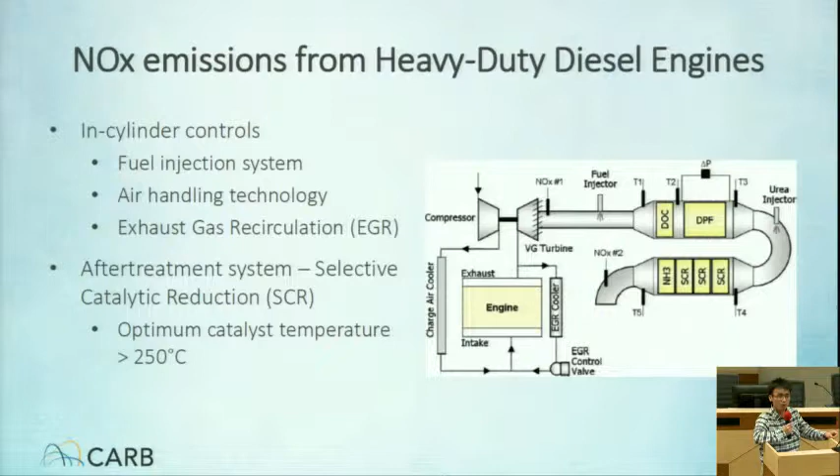The SCR system introduces aqueous urea to the SCR catalyst, which can decompose to form ammonia. This ammonia can react with NOx over the catalyst, forming nitrogen and water. The optimum catalyst temperature should be higher than 250 degrees C.

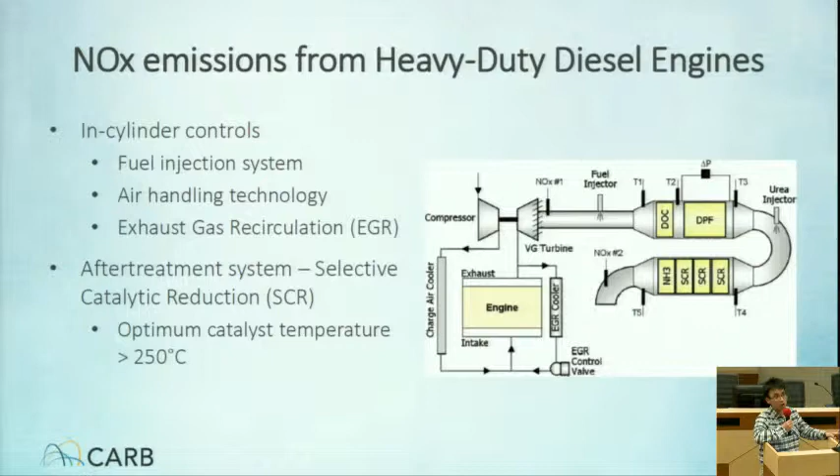Under these conditions, copper zeolite catalyst can reduce more than 90% of the total NOx.

Heavy-duty diesel vehicle certification is a very complicated process. These engines are certified using an engine dynamometer. Engines are tested over the federal test procedure, called FTP, and the supplemental emission test, called SET. NOx emissions should be less than 0.2 grams per brake horsepower hour, or the applicable family emission limit, FEL. Engine dyno testing uses laboratory-grade instruments, so it has very high accuracy and precision.

For the vehicles, there is an in-use compliance requirement. Engine-certified vehicles should meet the Not-To-Exceed, NTE, standard in real-world driving. Emissions are measured using portable emission measurement systems. These systems are less accurate compared to lab equipment.

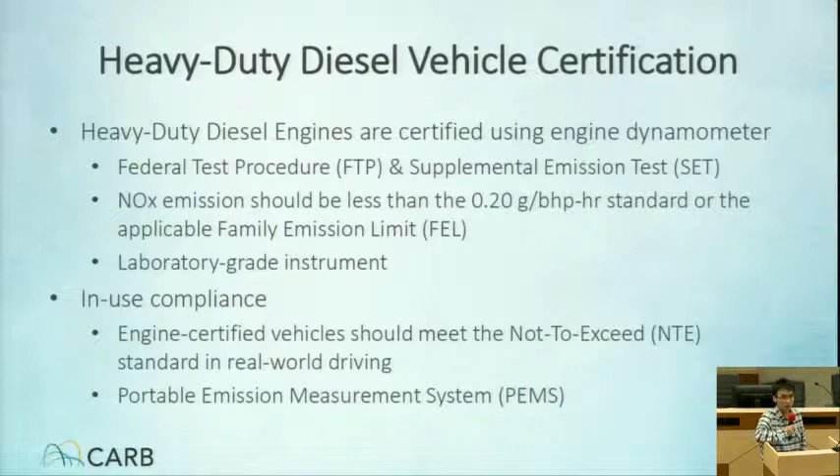However, real-world observations show that in-use NOx emissions can be much higher than expected. On the right side is a paper just accepted from our group, which showed that in-use NOx emissions can be much higher compared to the 0.2 grams per brake horsepower hour standard in many real-world applications.

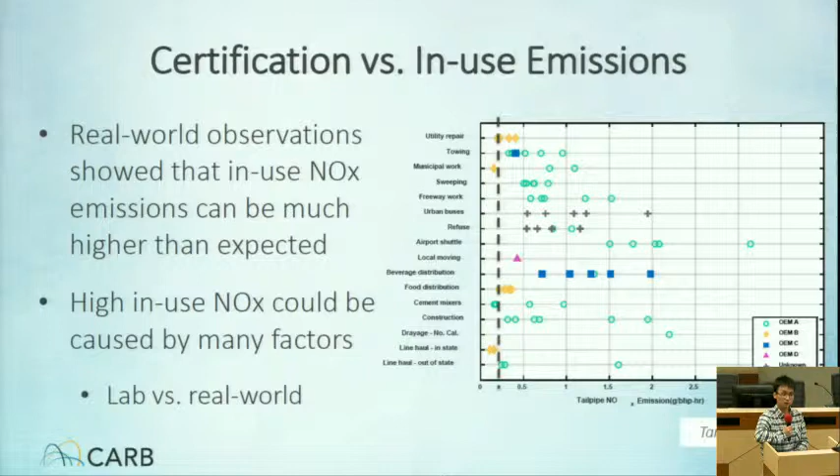High in-use NOx emissions could be caused by many factors, for example, the difference between lab conditions and real-world driving conditions, and differences in load factors. All those could contribute to the difference, but we want to understand the exact cause of these differences in this project.

As I mentioned earlier, heavy-duty vehicles have to meet the in-use compliance standard, the NTE standard. NTE requirements were developed back in early 2000, designed to help ensure heavy-duty diesel engines' in-use emissions are properly controlled. However, it's not a sufficient measure to control in-use emissions because it excluded a lot of operations.

For example, low-load operations are excluded by NTE, and when the exhaust temperature is colder than 250 degrees C, those operations are also excluded. So the NTE requirements only control a very limited area of engine operation, and we want to evaluate through this project how effective the current NTE standard is, and figure out if there are other alternative metrics.

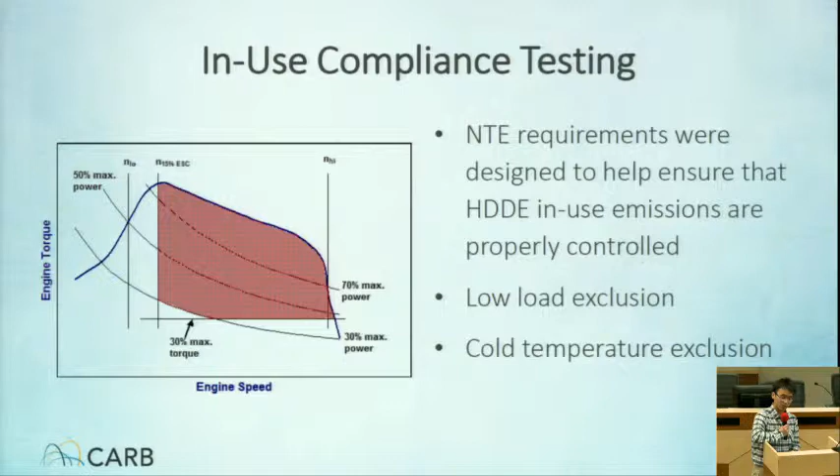So the objective of this project is to measure and understand the differences between NOx emissions on certification and in-use conditions for the same engine. We want to evaluate current and proposed in-use compliance procedures.

In this study, CE-CERT tested 2 heavy-duty diesel engines from 2 different OEMs. Both engines were certified to the 0.2 grams per brake horsepower hour NOx standard. They tested these engines on chassis dyno, engine dyno, and on-road, and they have some very interesting findings from this project.

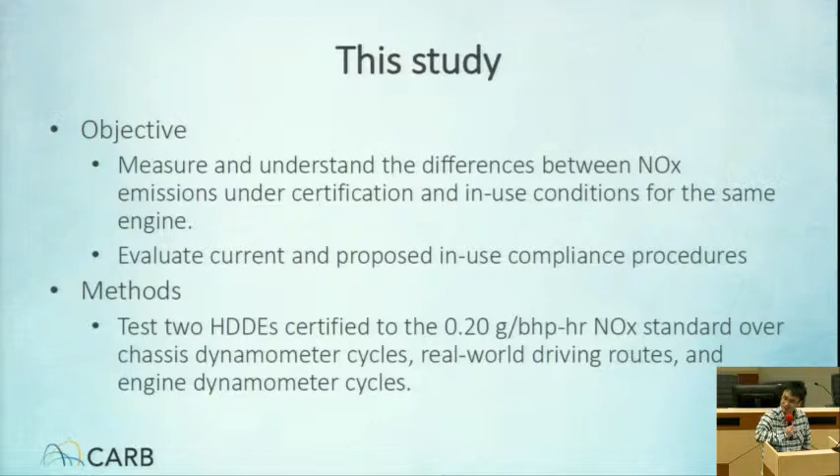So Tom, I will give this to you now, it's your turn, and you can talk about your findings.

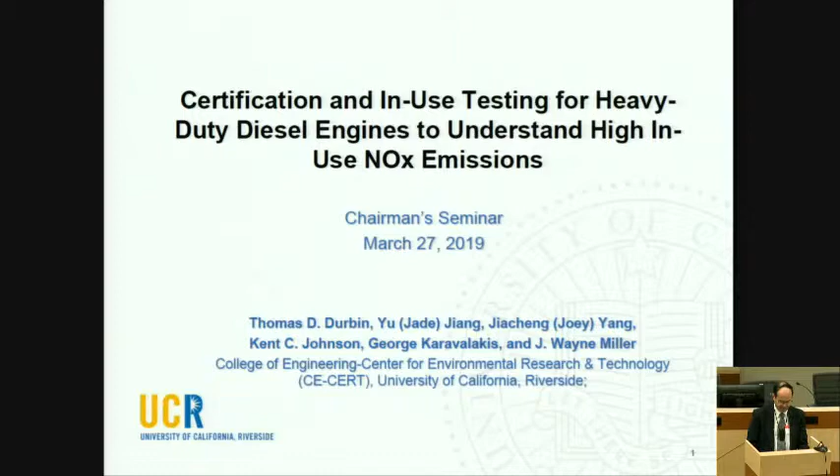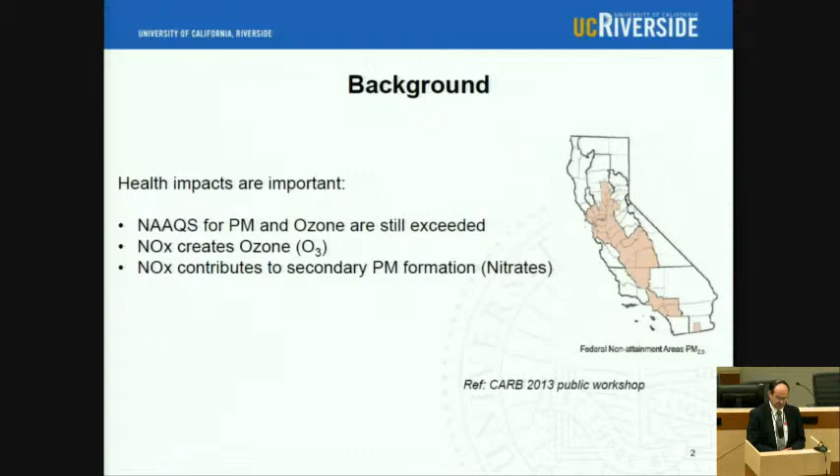Yi gave a good background there. I want to give just a little bit of a different background, starting out broadly, is that looking at health effects being very important and driving what's going on here. And if you look at the national air quality standards, you can see that there's a lot of non-attainment areas, both for PM and for ozone. NOx in particular contributes a lot to ozone, as well as the contribution to secondary PM formation in urban areas.

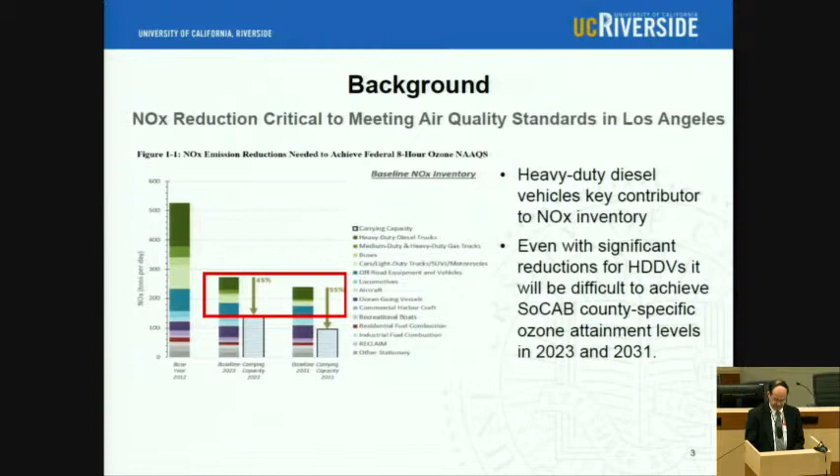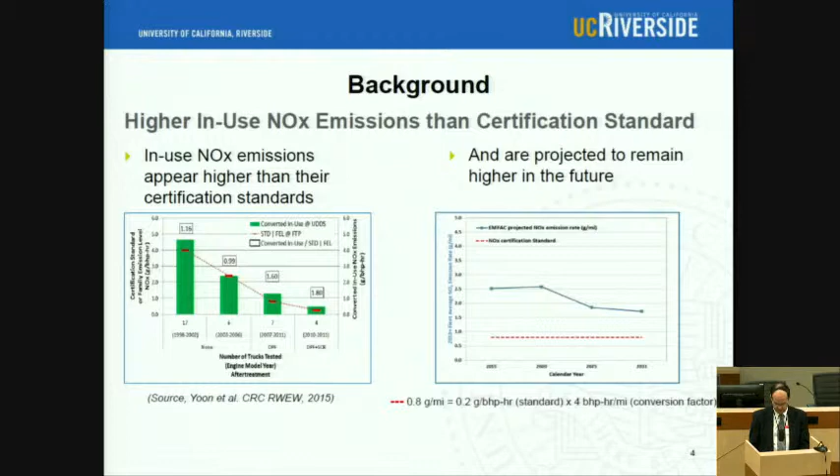On the right-hand side is simply looking into the future, and we look at the EMFAC projections of what the gram per mile emission rates are in blue, compared to the red dashed line, which is where one might expect if all operation was at that 0.2 level. You can see that there's likely to continue to be a disparity between the in-use and what one might hope for based on the certification.

So this particular study, the idea here is that heavy-duty diesel engines are designed and certified to meet emission standards on an engine dynamometer test stand before the engine gets inserted into the vehicle. So really we're trying to better understand that transition between the engine dynamometer testing and conditions to the in-use conditions on the same engine.

So basically we took two heavy-duty vehicles and we looked at emissions under varying conditions, including in-use conditions, chassis dynamometer conditions, and engine dynamometer testing conditions. The two vehicles were both 2013 to 14 vehicles that had engines certified to the 0.2 gram NOx standard.

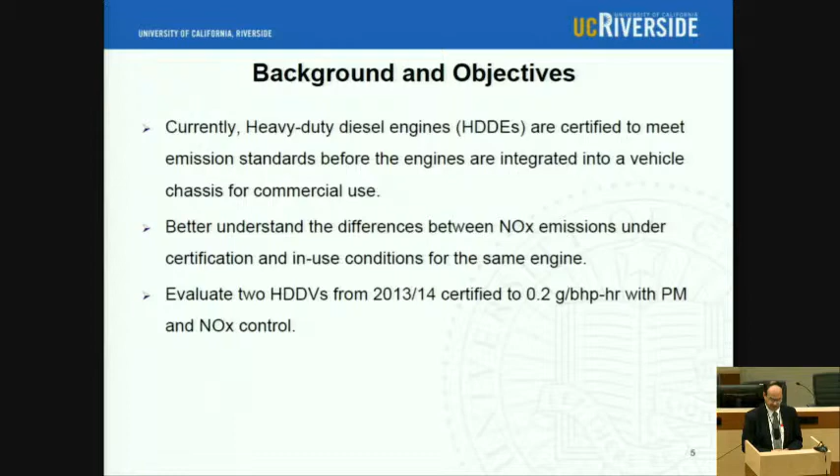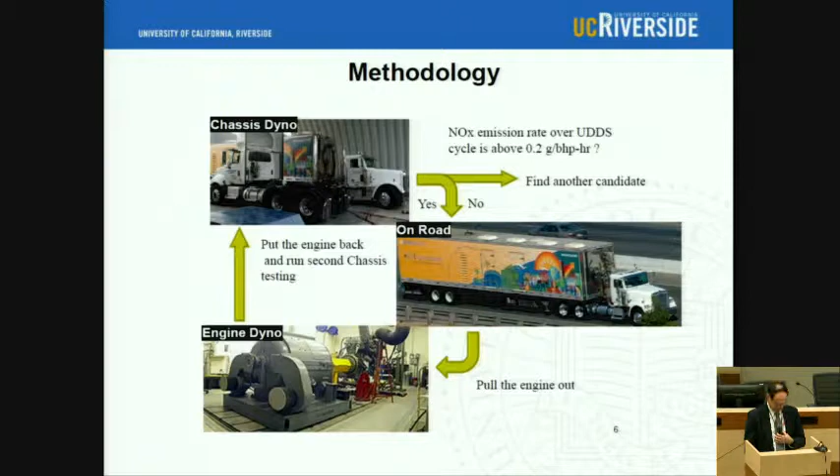The procedure for both vehicles was the same. We start off with the engine in the vehicle and on the chassis dynamometer, and we run it over a series of cycles, and we look to see if the UDDS emissions are higher than 0.2 gram per brake horsepower hour. Once we've confirmed that, we do some additional on-road testing with our mobile trailer, and actually a lot of that testing was done simply with PEMS that were mounted inside of the trailer. Then the engine was pulled out and put on our engine dynamometer test stand and run through a series of tests. And then finally, the engine was put back into the vehicle to see that we were roughly able to recreate the same conditions that the vehicle was seeing once it came into the test facility.

So this is a test matrix that breaks down the different types of testing that we did. This runs somewhat chronological, at least in terms of the main methodologies here. We basically did a chassis dynamometer test, and in doing that, we did tests representative of urban driving, including the UDDS test cycle, the CARB transient cycle, as well as freeway types of cycles that included cruise cycles at 55 and 65 miles per hour.

So once that was completed, we took the vehicle on road, and here we had three on-road cycles that were predominantly highway cycles. I'll provide more information on that later in the presentation. And then we replicated the UDDS on road, and I'll be talking about that later as well.

So for engine dynamometer testing, again, we did a series of tests. Some of them were FTP, UDDS type of tests that were more consistent with urban conditions. And then we did the ramp modal cycle and different cruise cycles that were basically adapted from chassis dynamometer data. And then finally, we returned the engine to the vehicle, and we ran a follow-up chassis dynamometer testing.

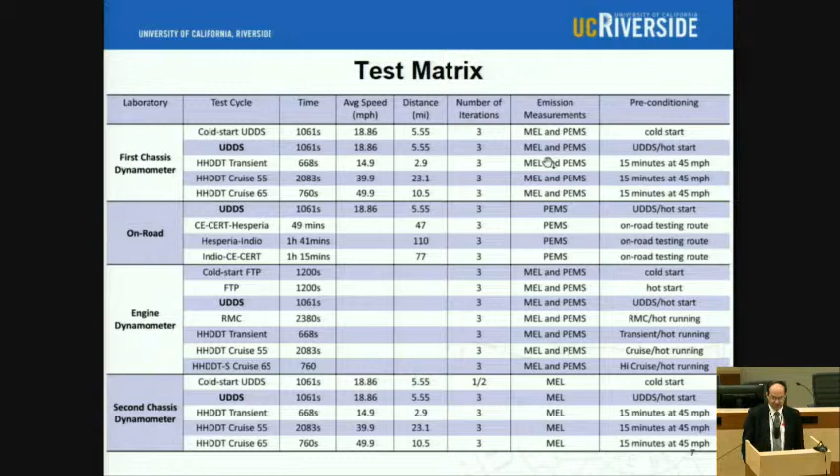So just going over the emissions measurements, we tried to look at the emissions with both our emissions trailer, which is 1065 compliant, as well as PEMS. So two different methods, except for the on-road, where we only used the PEMS, and the second chassis dynamometer, where we only used the emissions trailer.

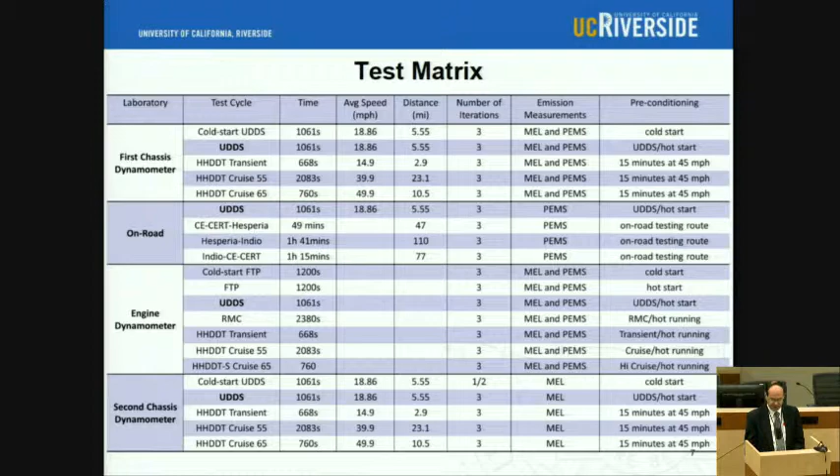And then we also have different preconditioning. Most of these were run as hot running cycles, where we warmed up the vehicle immediately before doing the cycle, with the exception of the UDDS cycles and the FTP cycles. Those were all run as hot start cycles with 20-minute soak periods in between tests.

is first, if you look at kind of metrics for comparison, obviously the certification standard at 0.2 might be one metric that you are looking to compare against. Again, we're not necessarily looking for this to be a certification substitute in any way, it is a research program.

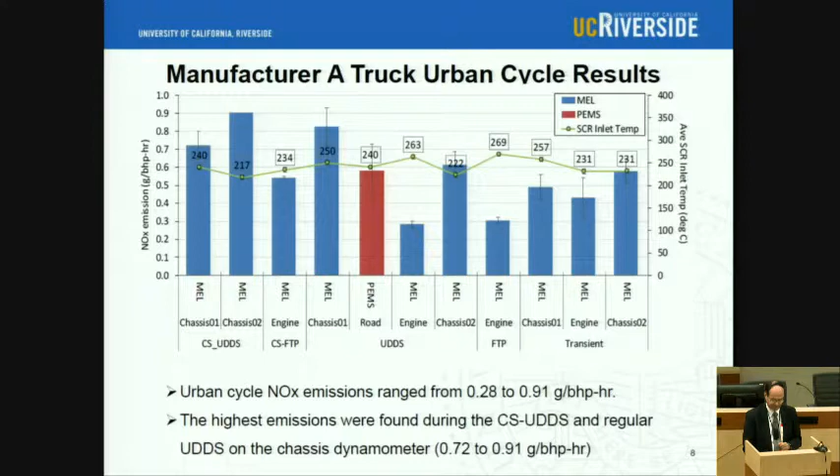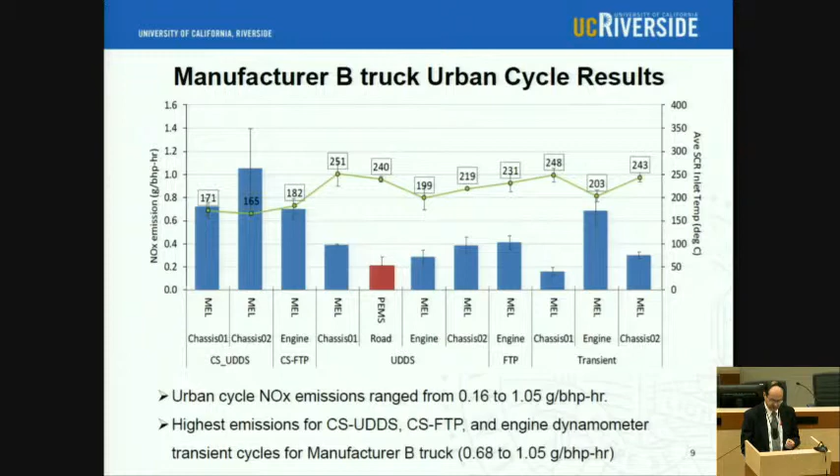what one might expect. And I will note that the engines had, I think one engine had slightly over 100,000 miles on it. The second engine had about 220 or 230,000 miles on it. So they're not brand new vehicles or brand new engines here that we're looking at.

Okay, so now let's move from the urban cycles to the cycles that are either freeway cruising cycles and or steady state, like the ramp modal cycle on the far right side here.

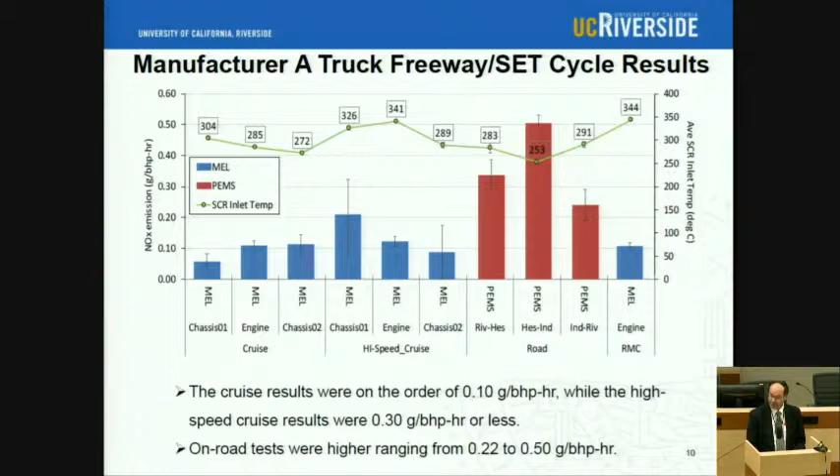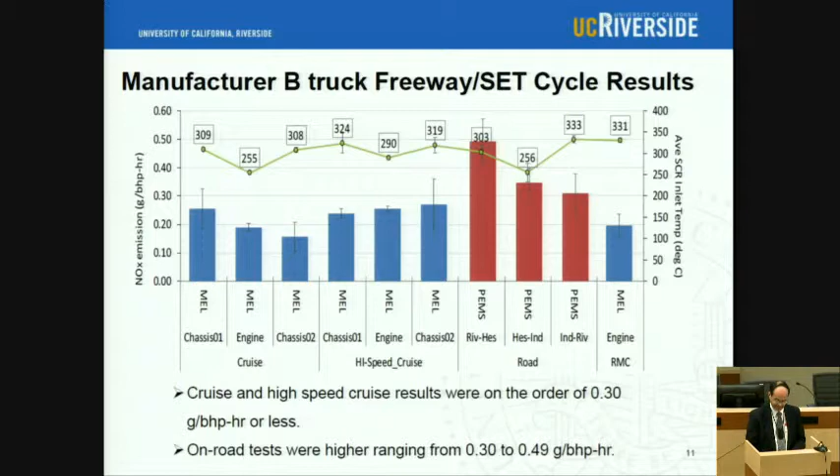Okay, so now we're going to look at some of the different test sequences in a little bit more detail to try to understand what is going on in terms of this comparison between the engine and the chassis dynamometer and on-road testing. So we're going to start off just with the base FTP tests.

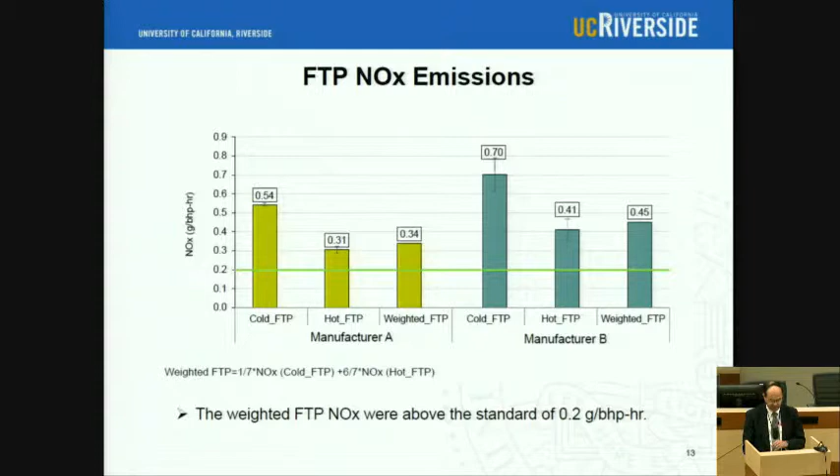So again here, the green line does show the certification. So at least for the engines we had in the laboratory, we were slightly above the certification standards for both engines. Again, that's not necessarily any indication of compliance. It's just kind of a baseline for where the engines were performing as they came out of the trucks at the mileages that we pulled them out. There's some additional details related to manufacturer A and the engine testing that I'm going to get to in a few minutes as well.

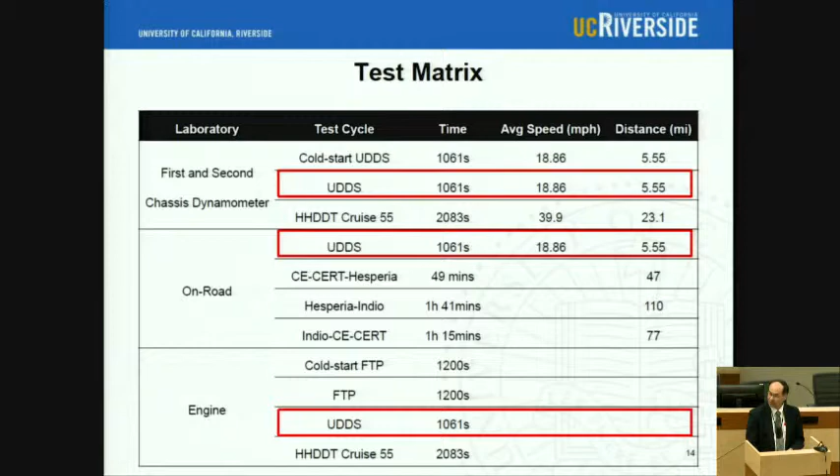So secondly, we want to look at some of the comparisons between the UDDS cycle, and the interesting part there is that this particular cycle was done in all of the different phases. So we did a UDDS for the chassis dynamometer. We replicated that UDDS for the in-use testing, or on-road testing, and then also for the engine dynamometer testing.

So I want to get into sort of how that was done. The starting point for all of the UDDS testing was the chassis dynamometer test. We ran the chassis dynamometer test on our chassis dynamometer as the first test that we did. So to translate that into the engine dynamometer test, we basically took the RPM and the torque values and directly translated them so that when we ran the engine dynamometer test, we basically mimicked the torque and RPM that was seen when we were doing the chassis dynamometer test.

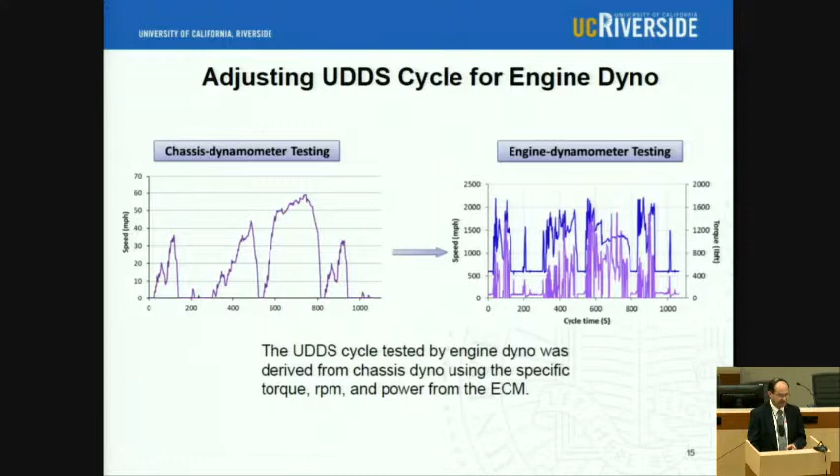Just as a frame of reference, some of the other engine dynamometer cycles were not directly pulled from this particular engine. They were basically pulled from the ACES program, where there was a lot of studies done in terms of converting chassis dynamometer to engine dynamometer test parameters. So for most of them, we pulled and utilized those cycles, but for the UDDS, we specifically looked at the engine that we were testing for this program to try to make it as close a comparison as we could.

Okay, so for the on-road UDDS, we had to use a little bit different strategy. Again, you're looking for a place that you want to have a relatively flat road. You want to have a road where you can drive relatively decent speeds for periods of time that are several miles, and you want to not be in a condition where you've got a lot of traffic that's going to interfere with that driving. And you live in Southern California, so it limits your options somewhat in what you can do. I mean, you can't do a UDDS on the freeway. You can't do it in the middle of the urban environment because you're going to be right in the middle of traffic.

So to do this, we basically went to the far eastern edge of the Palm Springs area to a place called Thermal, just east and south of Indio, California, if you're familiar with that. And we basically looked at some of the agriculture roads that are out there. If you look at the left-hand side of the screen, there's 3 different segments to the on-road testing here, denoted M1, M2, and M3. So what you can see here is that we did have to split the road up and run this as individual segments. There simply wasn't a road long enough to do this in one single iteration, where you wouldn't run into traffic lights or any kind of traffic conditions.

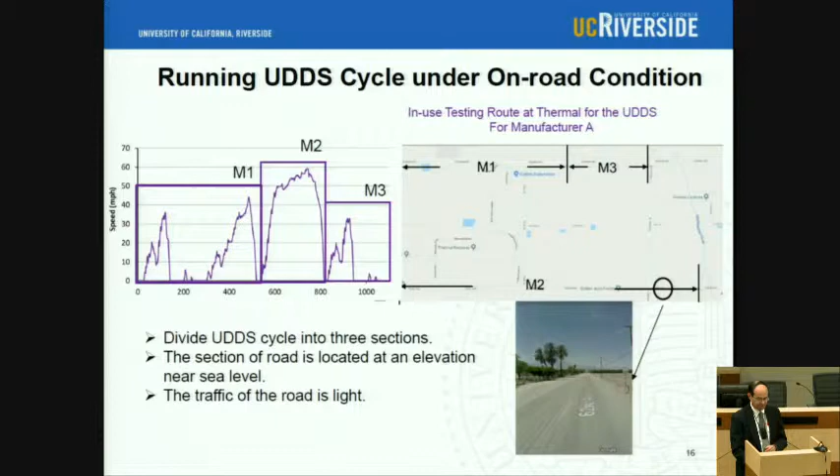So for the first vehicle, we ran segment M2, and I think M2 was run second or first, and we ran that on the southernmost road here that we were working on, and then M1 and M3 were on the northern roads. And for manufacturer B, we actually reversed that, and found that M2 was easier to run on that top road, and we ran the others at the bottom road. So pretty subtle differences, but we'll see that can make some differences when you look at very specific conditions.

In terms of the testing, I do need to point out that it's not a simple test to bring an in-use vehicle in, test it on a chassis dynamometer, pull the engine out, and put it back in, and it is an in-use vehicle someone wants to use, so you don't have all day or all year to work on this. We worked with the manufacturers to the best we could. For manufacturer B, we were pretty much able to run the engine dynamometer testing without any fault codes. We weren't able to clear some dashboard communication fault codes for manufacturer A during the engine dynamometer testing.

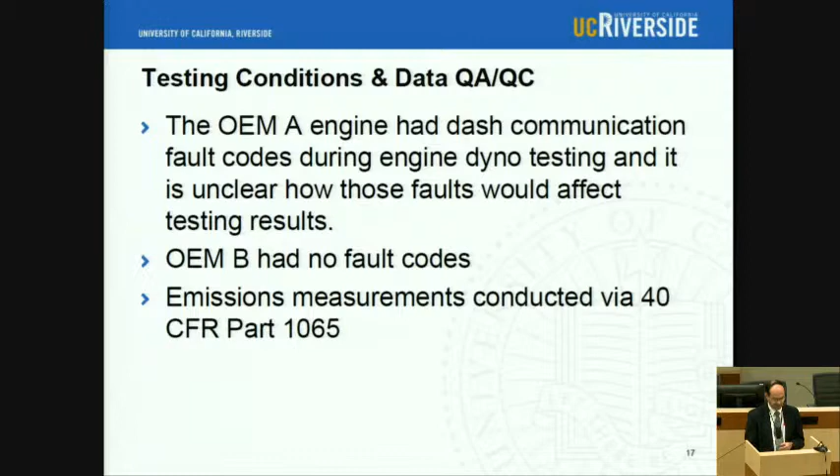That certainly complicated things, and I'll be talking about that in just a little bit. Again, we had two different types of 1065 measurements that we were making. One was with our emissions trailer, and the second was with the PEMS system.

Okay, so now let's look at this UDDS test that was done basically in a similar manner between the different types of testing we did. We're going to focus here on the comparison between the chassis dynamometer testing and the engine dynamometer testing. Here you can see that for both engines, we were a little bit lower on the engine dynamometer testing than we were on the chassis dynamometer testing.

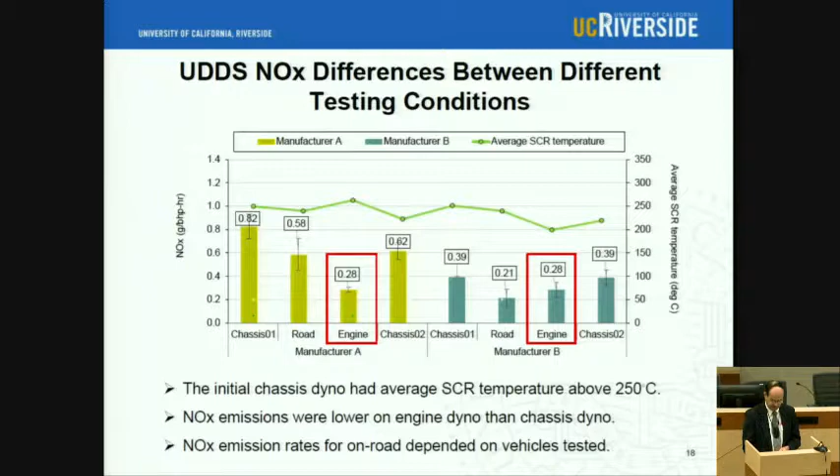On road, it was a little bit different. In some cases, the on-road was lower; in some cases, the on-road was higher than what we found on the engine dyno.

So let's look at manufacturer A. Again, in our discussions, we did have the fault code related to the dash communication, so we need to consider that in the results and understanding them.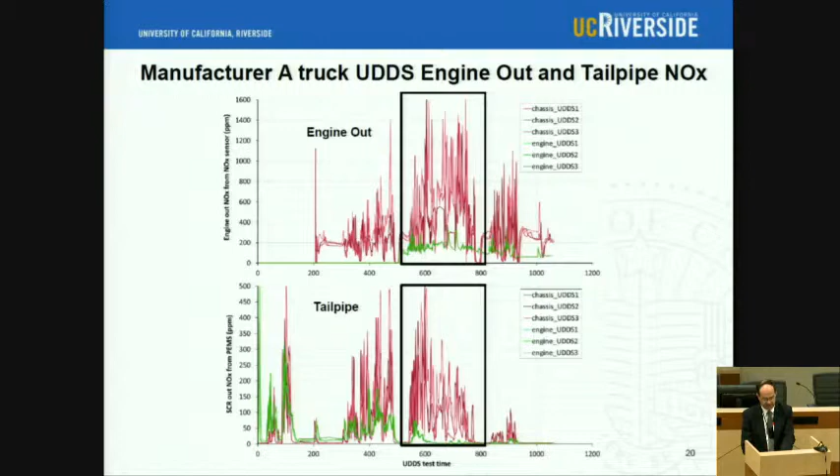Looking now at the engine out emissions, and this relates to some of the complications we had with this dash communication, we found lower engine out emissions on the engine dynamometer testing. Discussions with the manufacturer indicated that was due to this dash communication, and you can see here how that affected the tailpipe emissions.

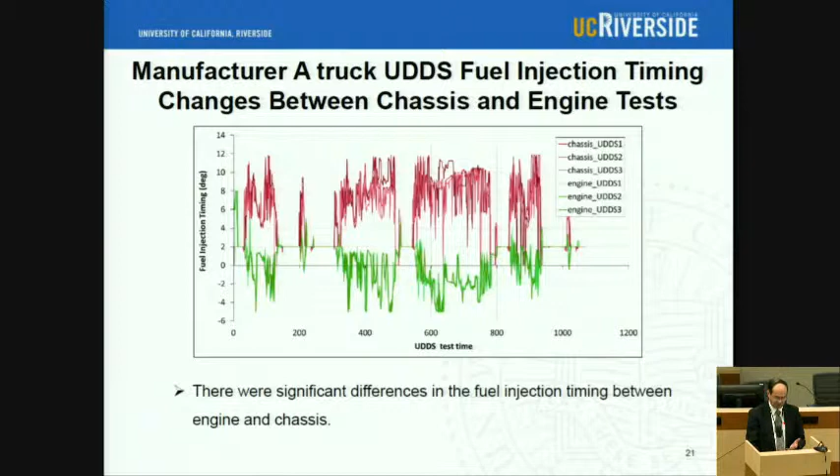The issue with that dash communication turned out to be that it would basically retard the fuel timing. So you can see here that the chassis dynamometer fuel timing was different than the engine dynamometer fuel timing. That was an issue we had in making those comparisons.

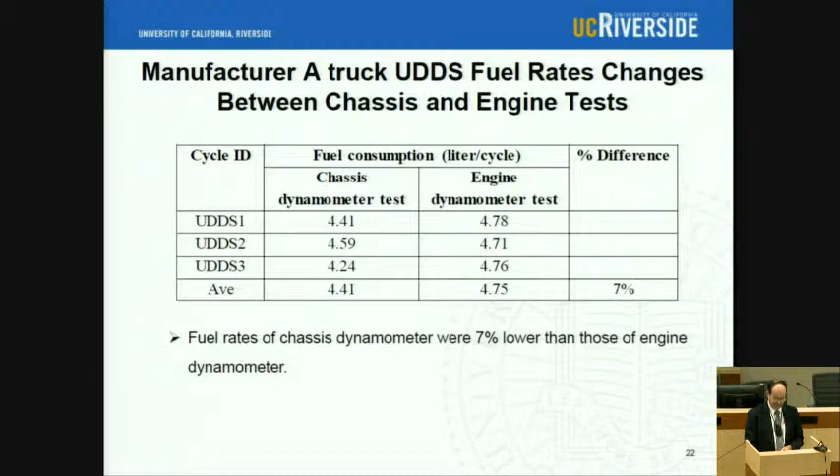Consistent with what you might expect if you're retarding the fuel timing, we did see there was about a 7% difference in fuel use between the engine and chassis tests, with lower fuel use on the chassis dynamometer testing.

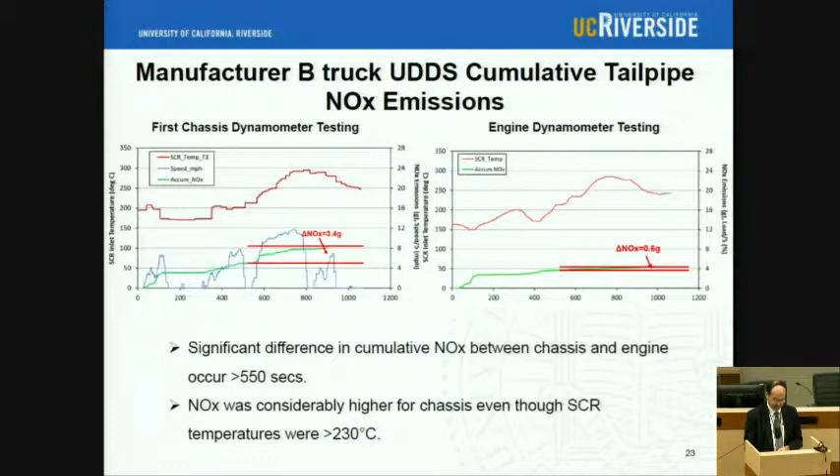Okay, so let's move on to manufacturer B and do the same comparison. Here we have, again, a lot of that difference in emissions from a similar time period. SCR temperatures, again indicated by the red line, were slightly different, but not necessarily substantially different. We did see some differences in engine out emissions that also contributed there as well.

We don't have as much data on the manufacturer B truck to indicate timing and fuel consumption. We did see lower CO2 on the chassis dynamometer testing, but we don't have all the information to do some similar analyses for that one.

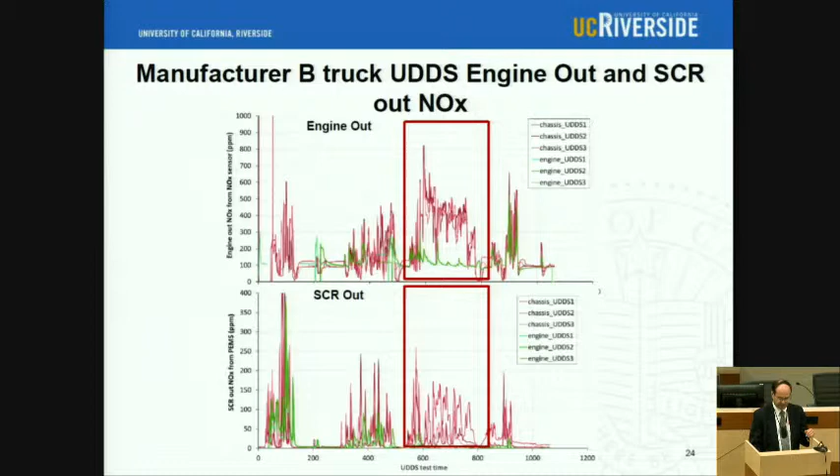So now let me turn to on-road. Here we're going to look at chassis dynamometer testing versus the on-road testing. Here we saw probably greater differences, in that for manufacturer B, we actually saw lower on-road emissions, or considerably the lowest emissions for the on-road testing.

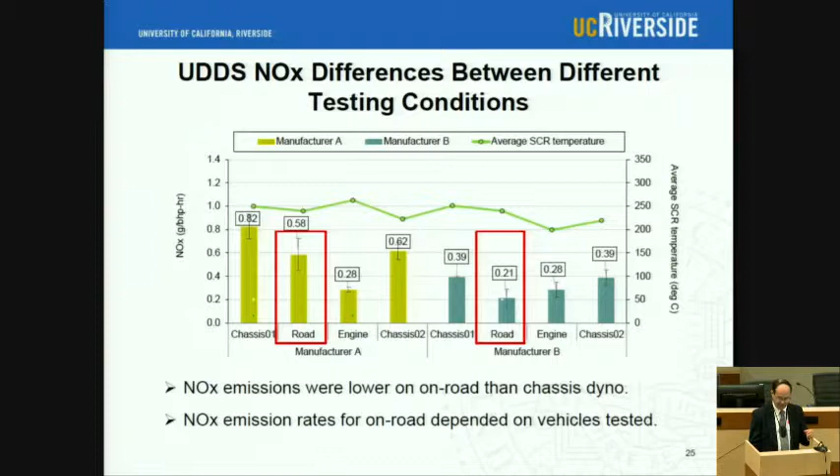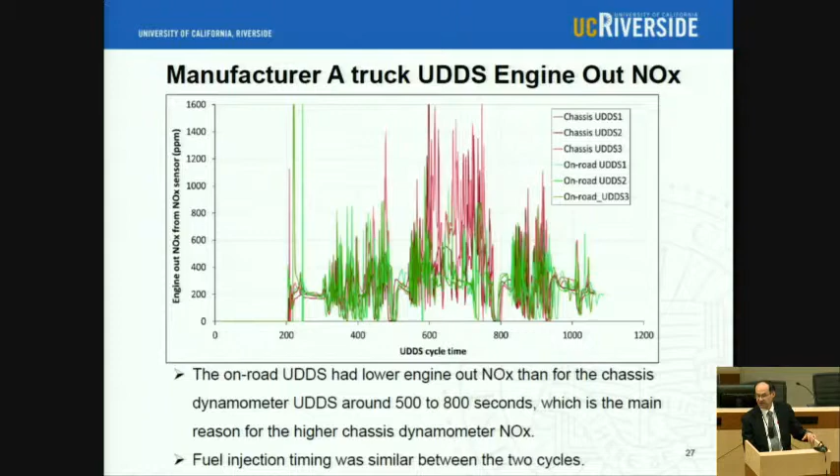So here we did see a little bit of difference also in the engine out NOx, but the fuel injection timing was not an issue there. It just indicates that there's a lot going on with that and a lot of things controlling it, and you're looking at fairly sensitive levels. You're not looking at necessarily huge differences between the on-road testing if you just go back and compare the first and second bars there.

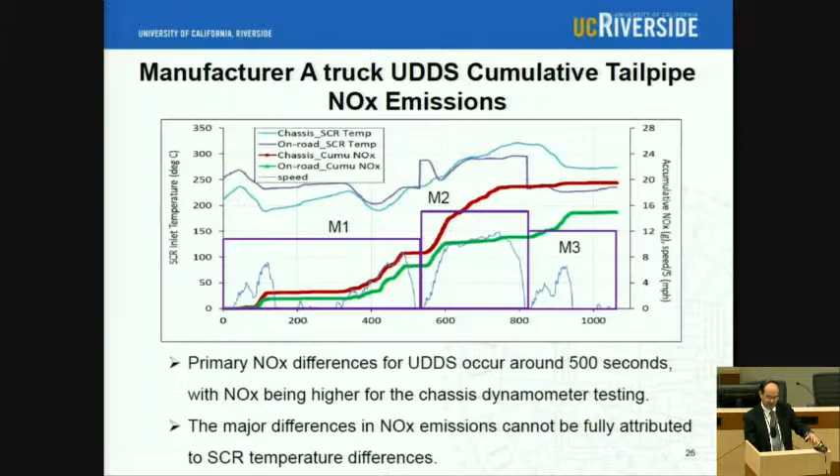So for manufacturer A here, you can see that again I've tried to separate the three segments because we did the on-road testing in three different segments. It depended from test to test, but for this particular example, since the M1 was done after M2, it tended to start out at a slightly higher temperature.

Interestingly enough, we've done this particular route for a number of years, and we've done a lot of comparisons over the years between chassis and engine dyno, and found pretty good consistency. That comparison becomes a lot more complicated when you get down to these vehicles operating at very low NOx levels. So you can see here just these subtle differences with the lower starting temperature.

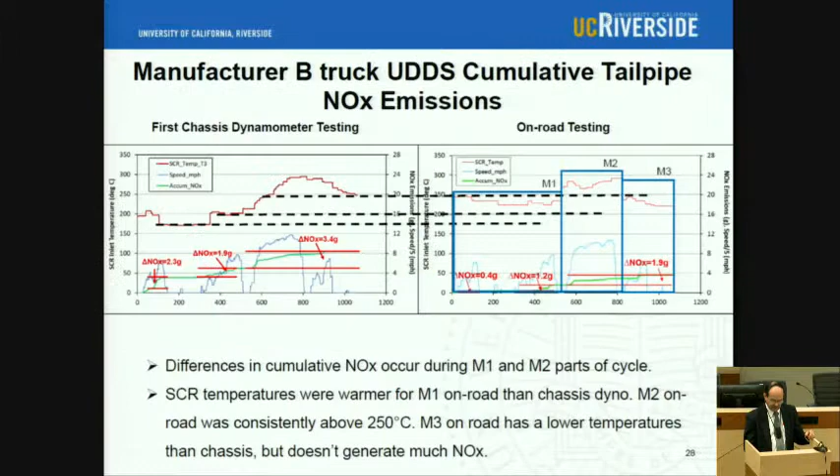And then if you look at M3, you do start to see the temperature drop for the on-road more so than you do for the chassis dynamometer, just because of the sequence that you're doing. We'll look at that and how that plays out in terms of NOx efficiencies in just a second.

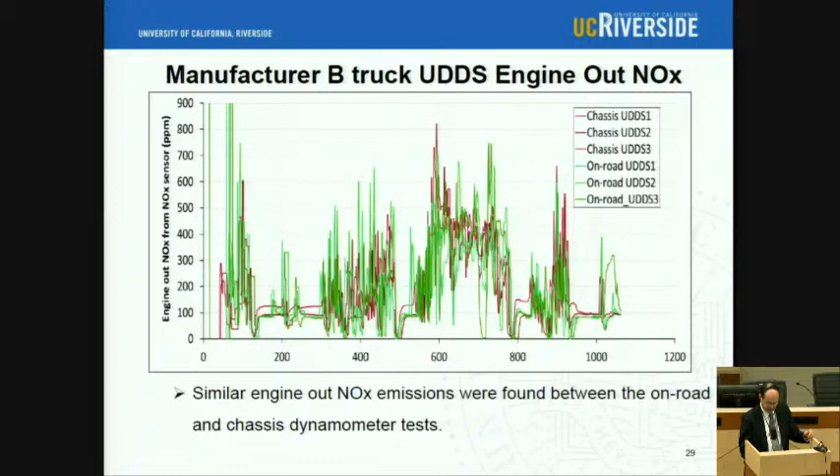So here, no real differences in engine out NOx, so that's not contributing to it. But when you look at the SCR efficiencies, you can see just those subtle differences between running different segments—significant NOx reduction there from the engine out levels in both cases. It's just slightly better NOx efficiency in the on-road case versus the chassis dynamometer case. And you can see that when you look at those small differences, they look bigger on a graph.

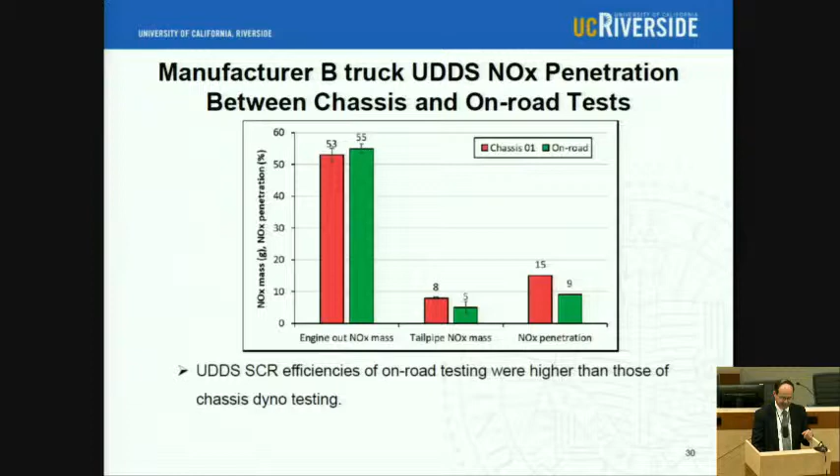Okay, so we did look at SCR efficiency as a function of temperature. The left side of the graph shows the efficiencies of the SCR system. This is comparing basically the engine out and tailpipe out NOx data, and NOx sensor data was used for this. You can see here that in a lot of cases you're above the 80% efficiency level, but as you get to below 250-degree temperatures, you start to see that efficiency drop off. Nothing too surprising, and we're certainly in the range of some of these theoretical curves here.

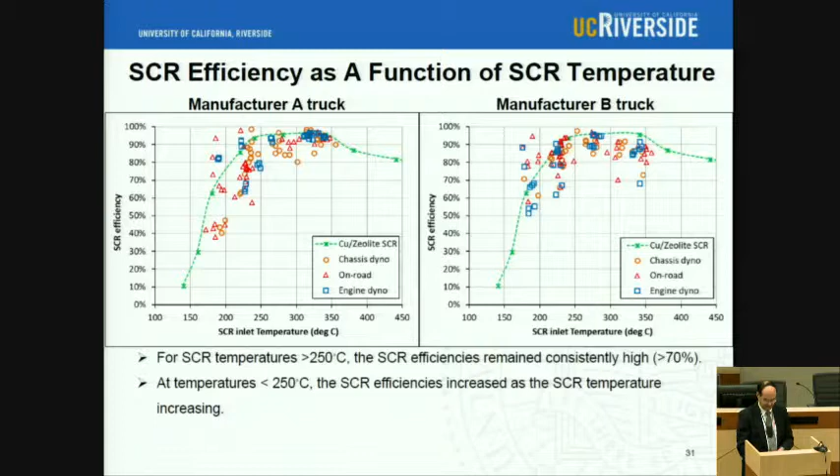So on-road testing, here we're now no longer talking about the UDDS, we're talking about the freeway driving portion of the on-road testing. What we're doing here is we're starting off at UC Riverside, and we're doing three different segments.

One segment basically goes up the Cajon Pass to a city called Hesperia, and this is a pretty aggressive hill climb. Then you come down from the hill—there's a Hesperia to Indio drive, and here you're downhill coming down from Hesperia, but you do have some elevation change between the bottom of the hill at Hesperia and Indio. Then there's the return route that we come back from Indio to our UC Riverside.

This is part of what ARB runs in their in-use surveillance testing. They start over here in El Monte, and they do this route, and generally they look at doing this route in a single day. For us, we were stopping because we were doing a lot of different work down in Indio, at the far right, far bottom of the screen. So these were segmented into different days depending on how we could do the testing conveniently, to get the on-road and the UDDSs done, given the constraints of the different test days.

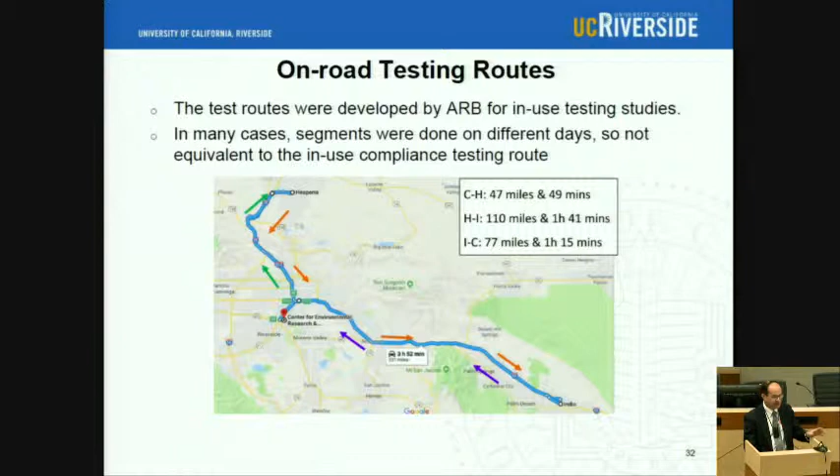So it's not necessarily that we're taking this data and saying it's going to be consistent with or equivalent to the in-use compliance testing that was done, that is being done by ARB.

And we're also taking the more aggressive part of the routes that are used by ARB in their in-use compliance testing as well. So you can see here that the bars in the box show the on-road testing over these 3 routes, and the comparison is with the other data points.

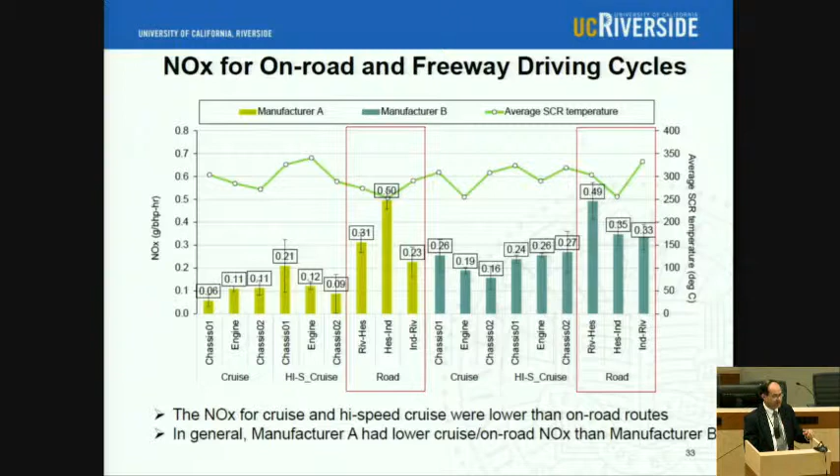Those are the chassis dynamometer cycles that we're running on our chassis dynamometer over freeway-like conditions, cruise type of conditions. And you can see on the chassis dynamometer, we're pretty much lower than what we're finding on road. But again, we're going up, we're looking at grades, grade change, a lot of different things when we go on road. And if you look at that 0.4 baseline here, or 0.37 baseline from in-use testing, we're not super far off that level, even when we go for the on-road, more aggressive cycles.

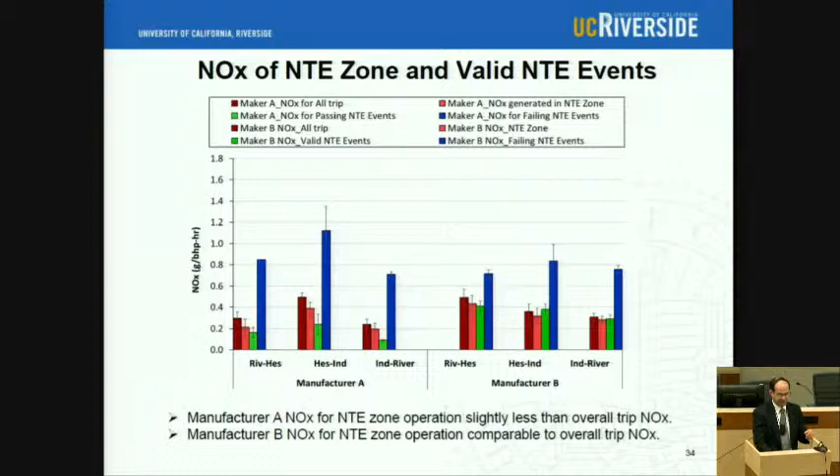So the green indicates where the passing NTE events are, and then the blue indicates the range of where the failing, the emission levels for the failing NTE events. And in terms of the NTE criteria, it's really based on having no more than 10% of the data on a time weight basis in this high region. So we're looking at less than 90% of that data, or greater than 90% of that data being in the lower region.

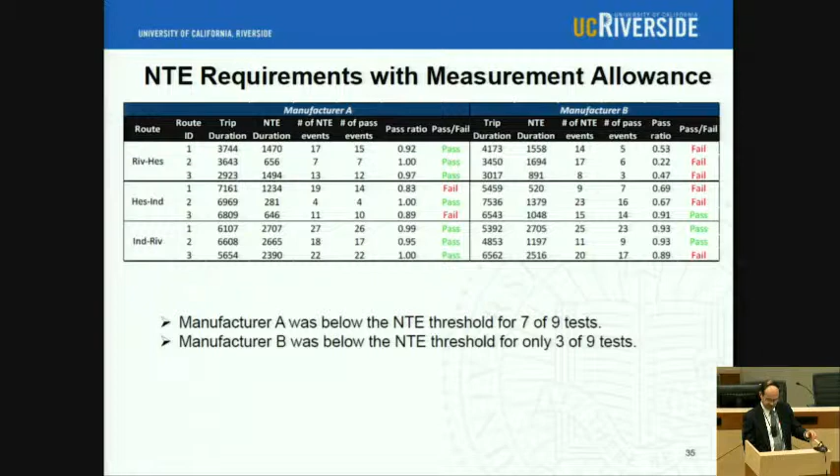So we did look at this, and it wasn't a compliance test - you know, we spread these out over multiple different days - but we did see for manufacturer A, for most of the routes, we did find passing values, and sort of the pass ratio is just based on the 90% of the duration being below the in-use threshold. And then for manufacturer B, we did see a lower pass ratio, as you can see from the information here.

Okay, so just in summary here, looking at the different techniques, we did generally see the engine dyno results showed lower NOx than the chassis dyno. The engine out emissions played an important role for that. We did see some fuel injection timing differences with manufacturer A that were related to this dash communication issue. So we have to be very cautious, obviously, in interpreting and trying to understand that.

So for the on-road data, we generally showed lower data on-road than for the UDDS than on the chassis, and both the engine out NOx and the SCR efficiency differences played into this. So I think if you look at the totality of everything we looked at, you can say that there are a number of different factors that play an important role in understanding NOx differences under different types of operating conditions, ranging from engine out emissions, SCR temperature differences, and efficiency differences, and also even how you are driving and transitioning between different types of driving.

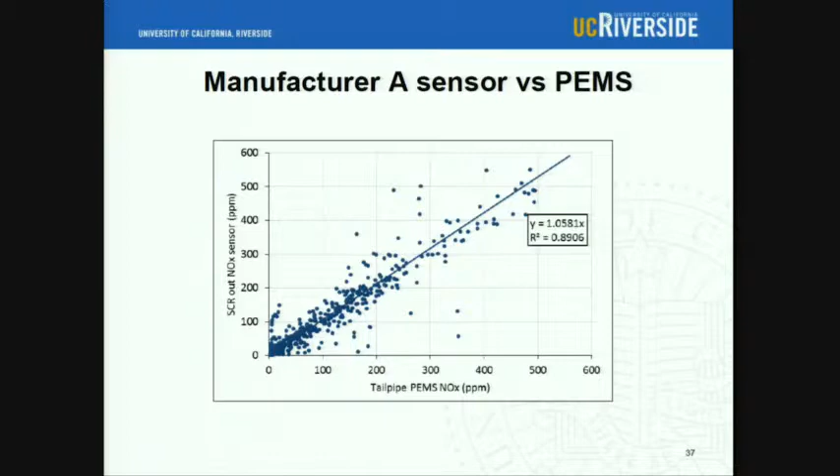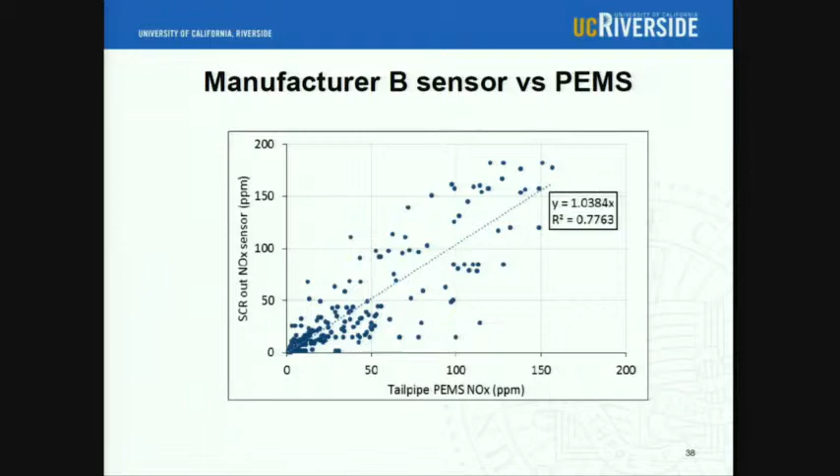You can see there's a fairly good correlation for manufacturer A, with an R squared of almost 0.9 and a slope of about 1.06. The R squared is not quite as good for the manufacturer B sensor. I don't remember which of these was the 2013 versus the 2014. I do think this sensor technology is continuing to advance fairly rapidly in terms of accuracy. The data I'm hearing right now is typically most of these are within 10% or better. There are some specific differences here, but I think as time goes on those differences will shrink to inside that 10% window.

Another question: was the time while the NOx sensors offline removed from the data set before plotting the comparison data? I believe so, yeah. And the question -- oh, this is a very long email.

From someone anonymous: Were engine A and engine B placed in the same chassis for on-road testing? No. Each one was its own individual truck.

The second question is related to that, because the slides indicate chassis 1 and chassis 2. Assuming chassis 1 and chassis 2 were unique to each engine, was the rear gear ratio the same? What about the transmission, the tires, and the driver? Are they the same? The driver certainly was the same for all of the driving testing. In terms of the transmission ratios and stuff like that, I don't know off the top of my head. We have that data somewhere, but it's not something I think we looked at in great detail.